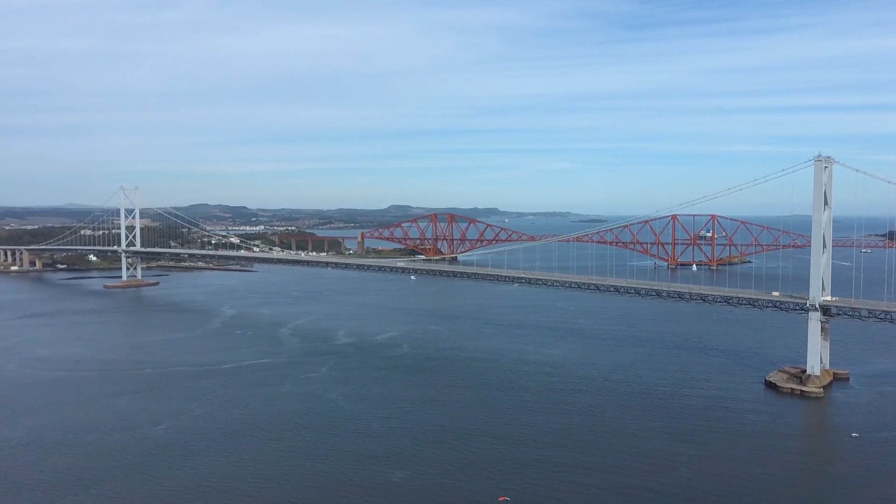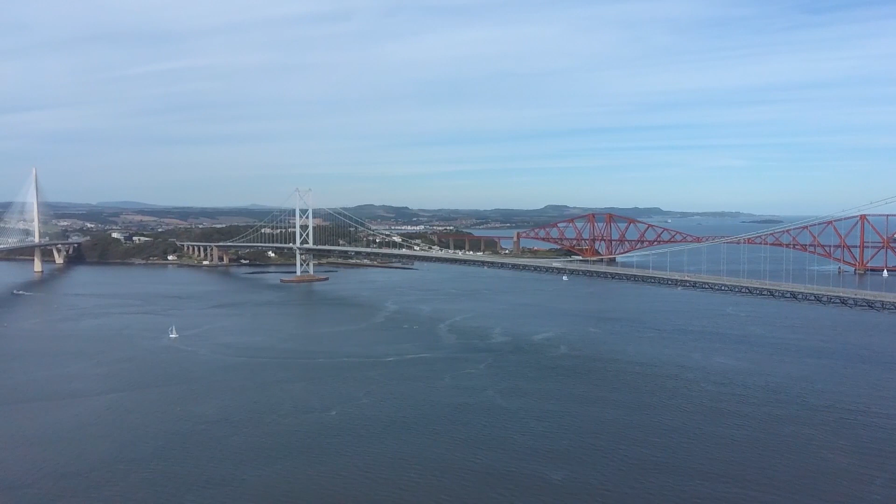Hello and welcome. My name is Gabriel Neves. When I moved to Scotland 14 years ago to work for Grontmij, now SWECO, I had the chance to deep learn reinforcement for British standards. That experience was crucial to adapt to a new way of work that was about to come. When I moved to WSP, my world turned upside down: BIM, Revit, Bentley OpenRoads, Tekla Structures. Before I started my dream job at Trimble, I worked at AECOM. Once more, I had the opportunity to be part of teams that were delivering great projects.

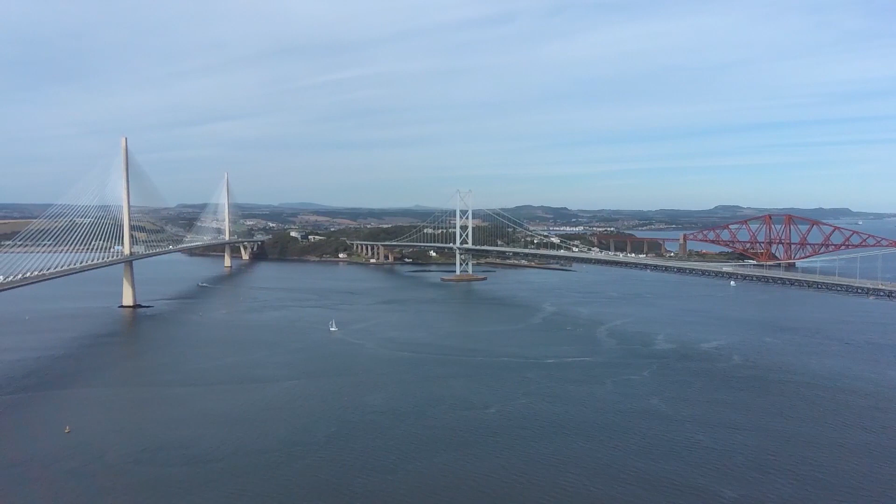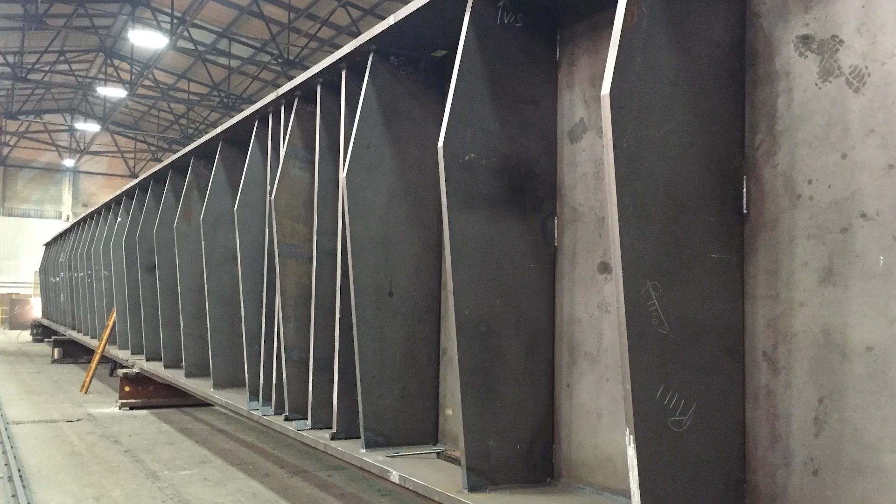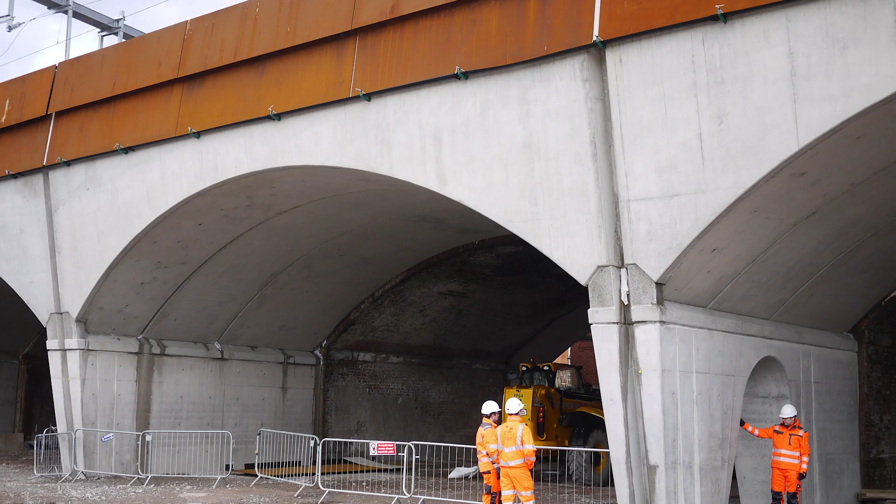One of the experiences that influenced me most was being in contact with construction sites. I realized how things worked on site and understood the contractor's needs, and the way BIM models needed to be to help construction and fabrication. One of my best memories regarding value engineering was when I sat with the BAM Nuttall Skanska Alliance to revise the reinforcement solution for Manchester Northern Hub. Due to the complexity of the geometry, the models had so many rebar shapes that the cost of rebar more than doubled. It was great to work with those that have site experience and realize that without collaboration we cannot deliver efficiently. We put all those models back on track and the cost back to its normal values.

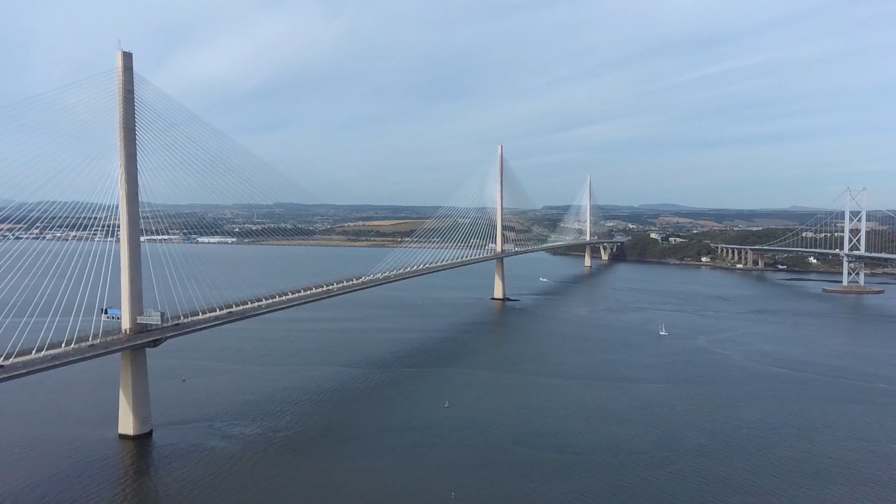Today, I'm going to cover many subjects. If you are just starting, don't be scared or overwhelmed - be inspired. If you are already doing it, don't be steady - be inquisitive and passionate. Here is the structure for today's presentation.

Part 1: What is BRIM? Bridges Information Modeling, BIM for bridges. Part 2: Why are others adopting BRIM? Part 3: How are they getting there? Part 4: Just one advantage among many. Part 5: Can we progress even more? Part 6: The takeaway and conclusion.

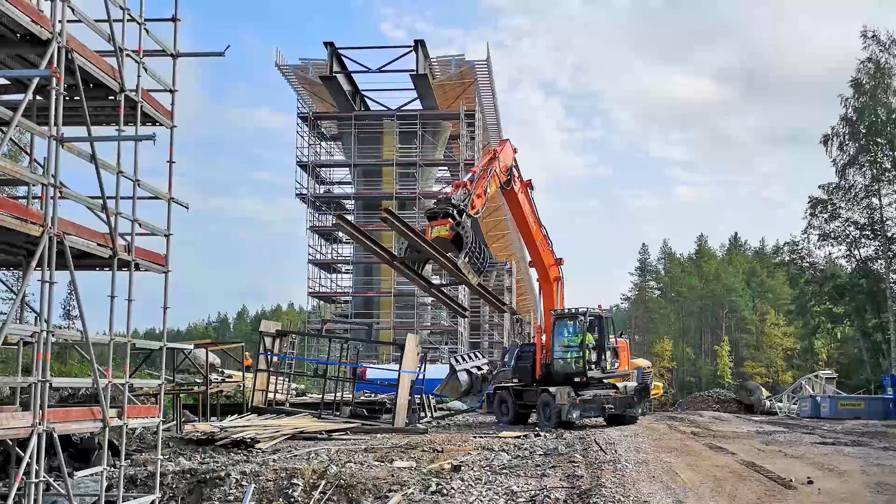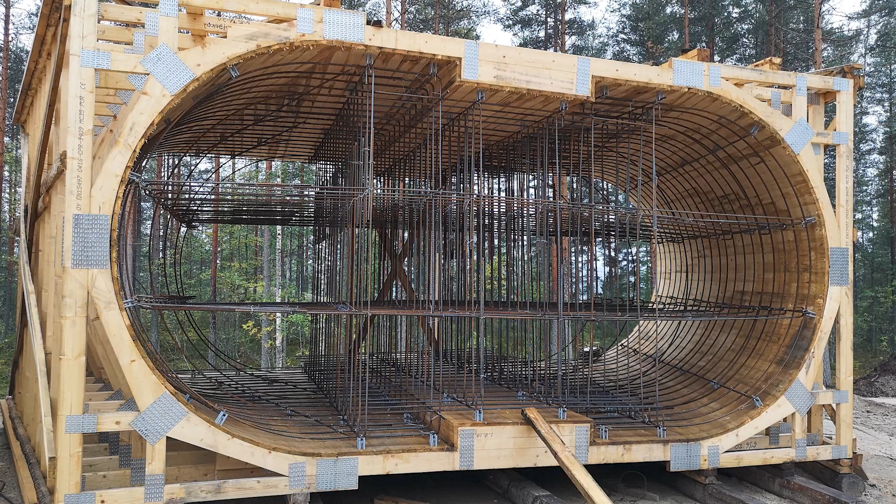A couple of years ago, Professor Ioannis Brilakis of Cambridge University visited the Trimble office in Helsinki, Finland, and shared that the only industry that was behind construction industry in adoption of new technologies was agriculture. And while every other business was moving towards increased productivity and use of new technologies, the construction industry was staying behind despite the proven advantages. I would risk saying that the bridge sector was probably one of the last to embrace BIM.

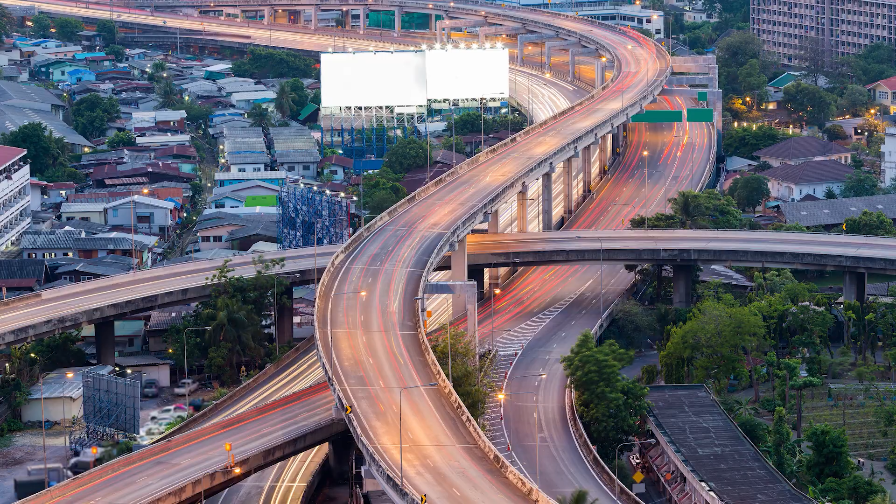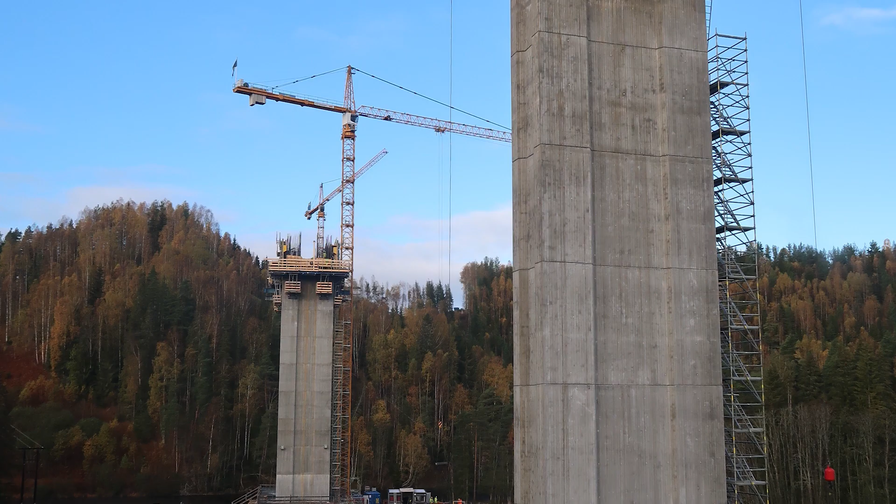This leads us to the fundamental question: what is BRIM? Before we start analyzing the name itself, BRIM, Bridges Information Modeling, let me introduce the Randselva Bridge, a drawing-less project from design, approval, detailing, and now construction. I have interviewed the designer, the detailers, and the approver. For me, this was truly inspiring. I'm going to use small parts of that interview throughout this presentation.

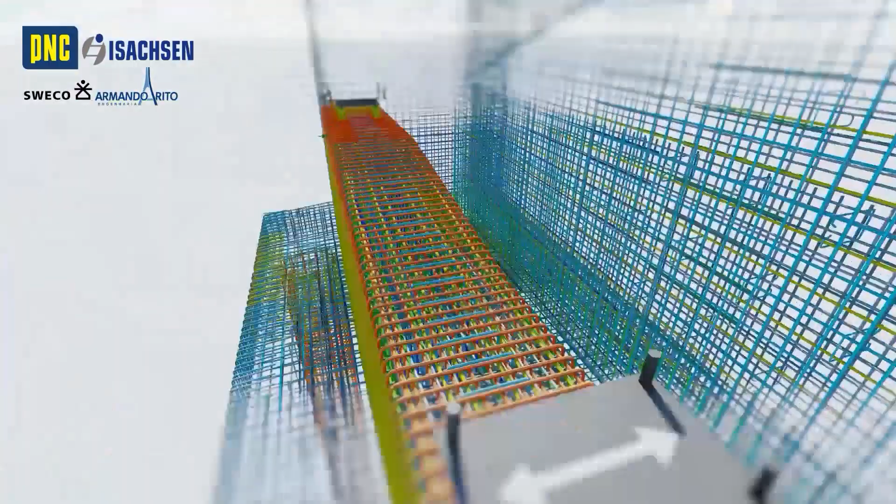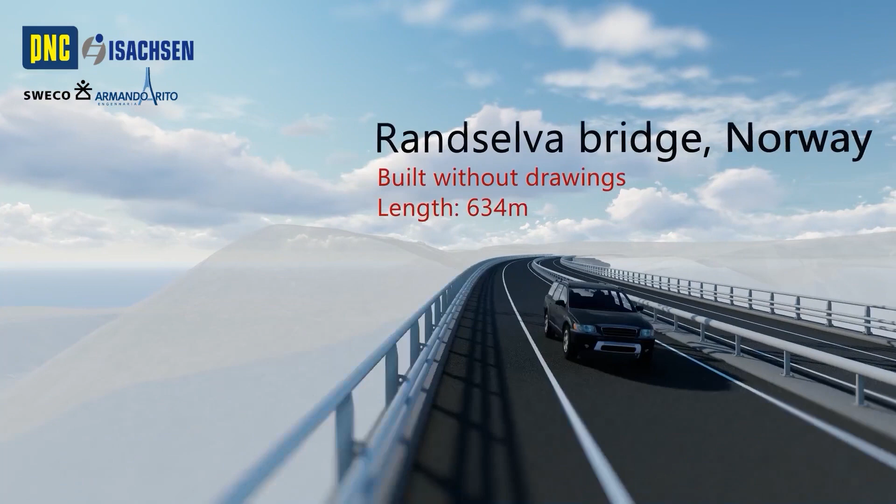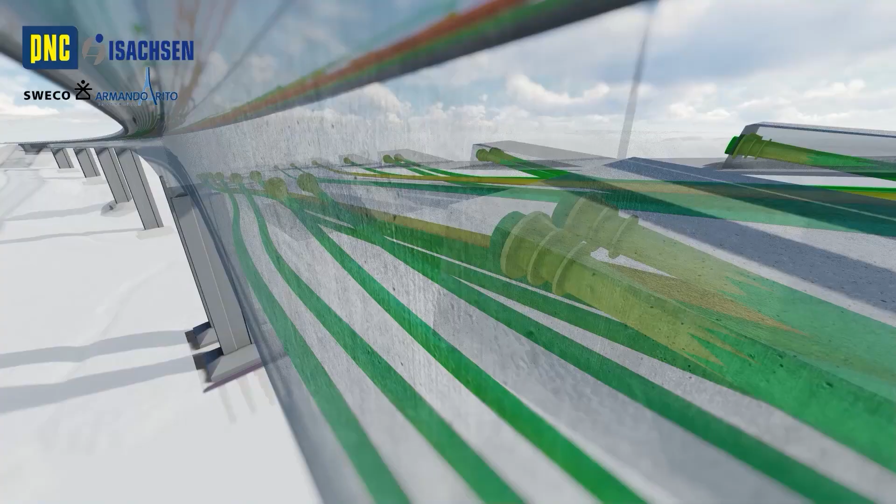Let's break down the word BRIM. Bridges - our specific industry object, our design, construction, or asset. Information - this is the most important point of this way of work. You can have procedures, standards, or even 3D models, but with no information, there is no BRIM. Modeling - model everything. These enriched data models are truly constructible. I know I upset some of you by using BrIM and not BIM, but I'm doing it for a couple of reasons. Bridges are different from buildings. It is more empowering having an exclusive name for us, bridges people. The word building is not a verb, but it should be - building a bridge. Anyway, don't get confused, it is pretty much the same thing.

And now my own definition of BrIM. BrIM is a technological breakthrough, a way of work that focuses on collaboration and automation of the use of the information that generates connected and updated digital data-enriched 3D models by providing a true representation of the physical and functional characteristics of the asset, from its design throughout its entire life cycle.

The BrIM cycle becomes complete when specific norms, standards, adoption of non-proprietary file formats such as IFC, and implementation of common data environment platforms where the information can run smoothly are implemented.

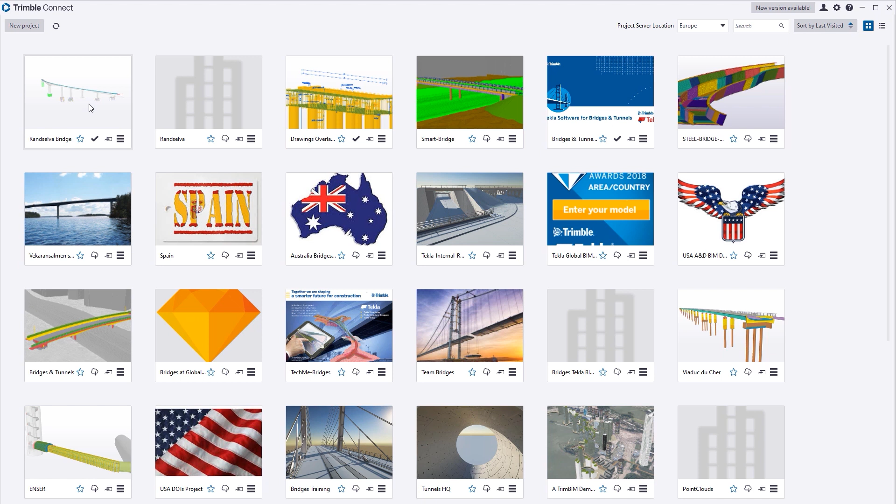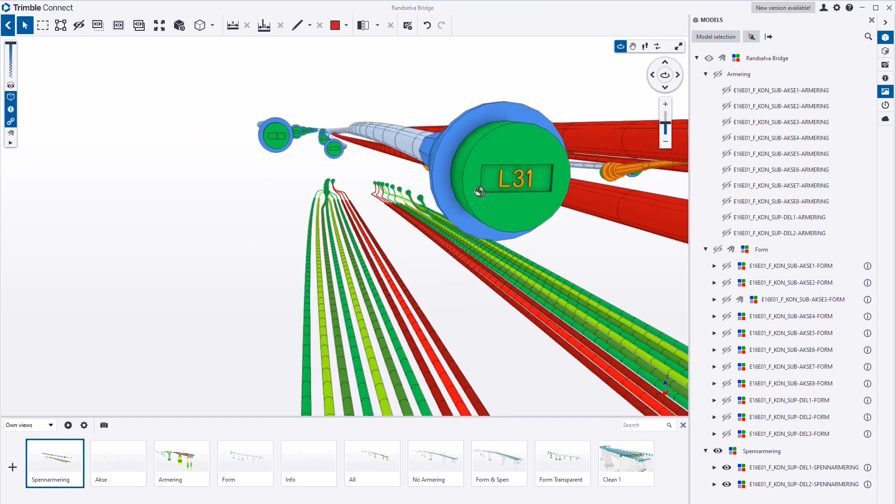Let's break this down and try to apply this definition to the Randselva Bridge project. They are using all kinds of advanced technology, from software to hardware. They are creating 3D models seamlessly shared with approvers, designers, detailers, contractors, and clients. The model is enriched with all the data, aka attributes, that are needed during the entire workflow.

Later, more attributes will be added to the model to make it ready for operations and maintenance. It is following Norwegian standards and some more based on lessons learned from SWECO's experience and this kind of way of work. As well, the approver's experience were added.

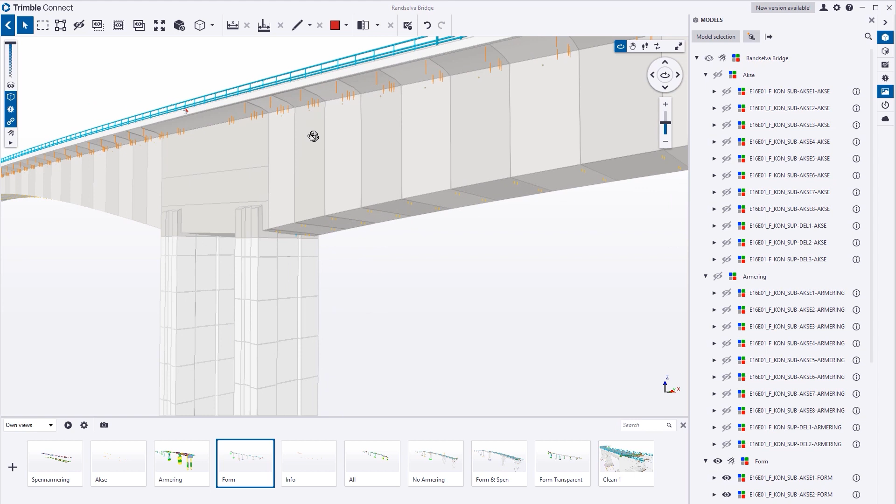IFC is the word, a software vendor-neutral solution to share the models. Different common data environment systems were used during the project. There is one that the road authorities are using to collaborate with designers during the approval process, and a couple of others for designers and contractors. The smart thing here is that the information is absolutely the same everywhere.

The goal is to model everything. The safeguard is, if it is not working in the model, then it will not work on site.

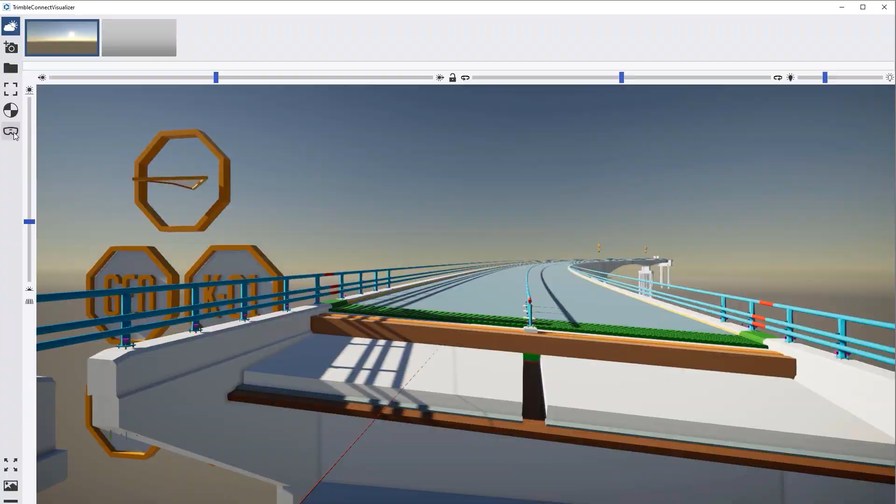The short answer is, why are you doing this? Sigmund, take it away. Yeah, it's already been answered, isn't it? Why not? That's fairly easy.

This is what engineers, or whoever in the industry, live for this challenge, you know. And why don't they grasp it with both hands and run with it? And that's the question. The answer is why not?

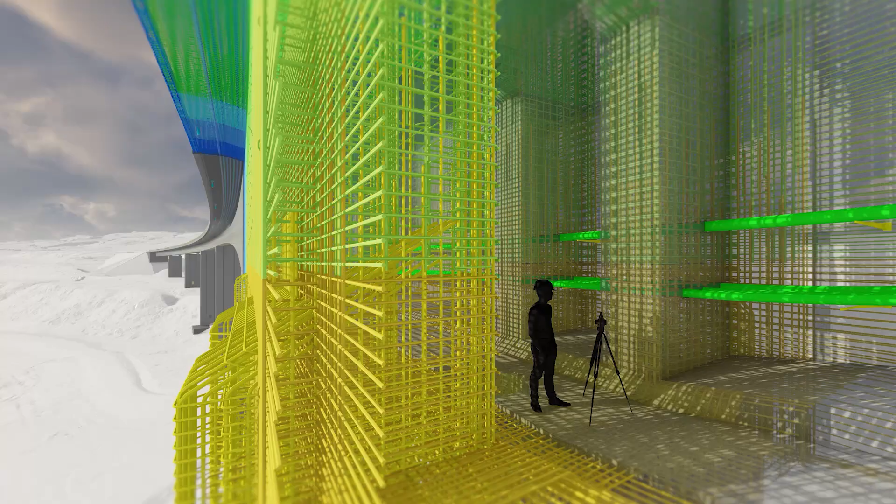Now the serious one is, I think there's also for all of us a need to improve all the time. So you don't want to be stuck repeating the same things. But if you see something that you can advance, you're gonna do it.

Just not having to do extremely boring 2D reinforcement drawings, that's motivation in itself. But I think my main point is, if we're gonna make robots do more of the work that we do in the future, there's really no other way of doing it.

For me personally, it's because it's fun, and it's fantastic to know that we can make a difference. Each of us can make a difference. Also, that we will always have the chance to improve, if we work hard, and we believe we can do it.

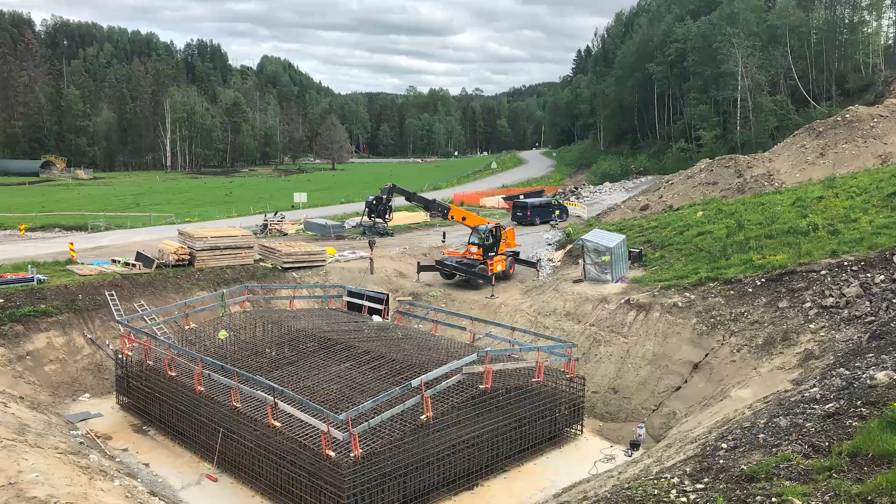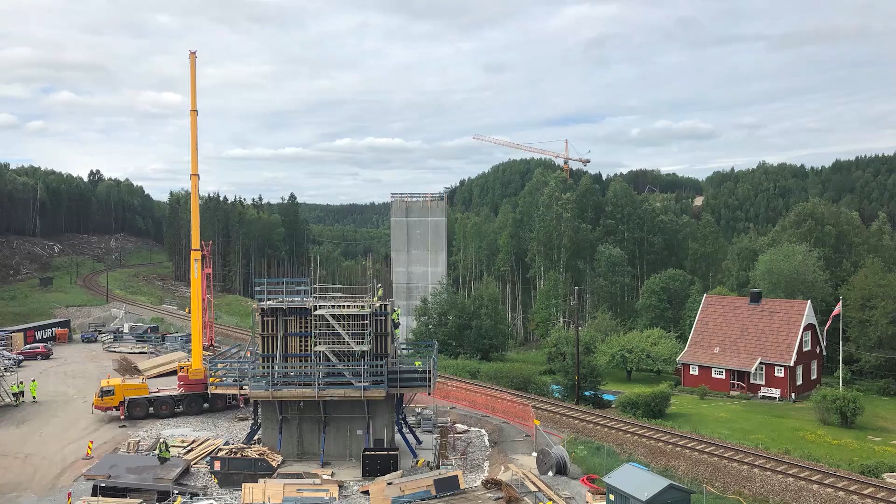During the long interview with the Randselva Bridge team, I learned a great deal about how BrIM is applied into a real job for drawing-free bridge projects. The first point was maybe the most important one: the idea for the drawing-less project came from the client.

The owner of the project is Statens Vegvesen, the Norwegian road authorities. Does that mean the owner wanted to do this project this way? Well, obviously the owner is instrumental in deciding whether to use BIM or not. So sure, the project owner is the one that wanted it.

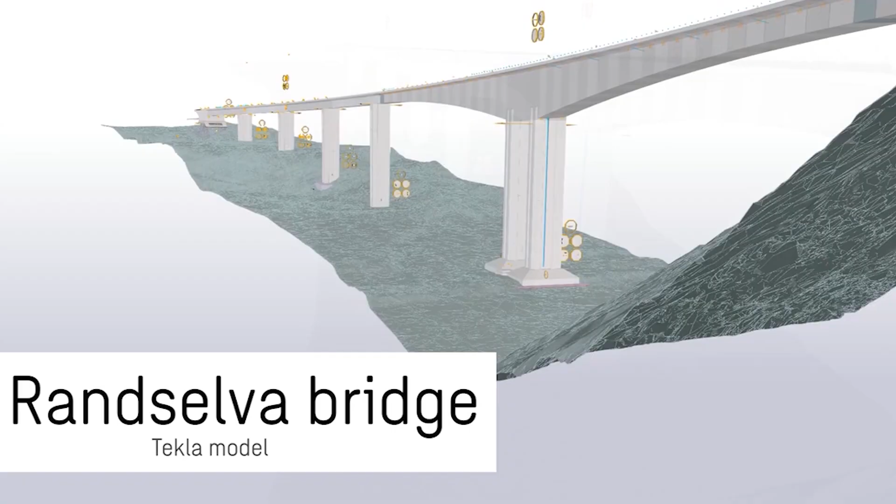During the Ministry of Bridges episode about BrIM, I highlighted a couple of points for how to get there. Let's play those against the Randselva Bridge and check if they are valid points or not. Define your strategy? Yes, they all sat together and defined the strategy. Efficient system of communication? Yes.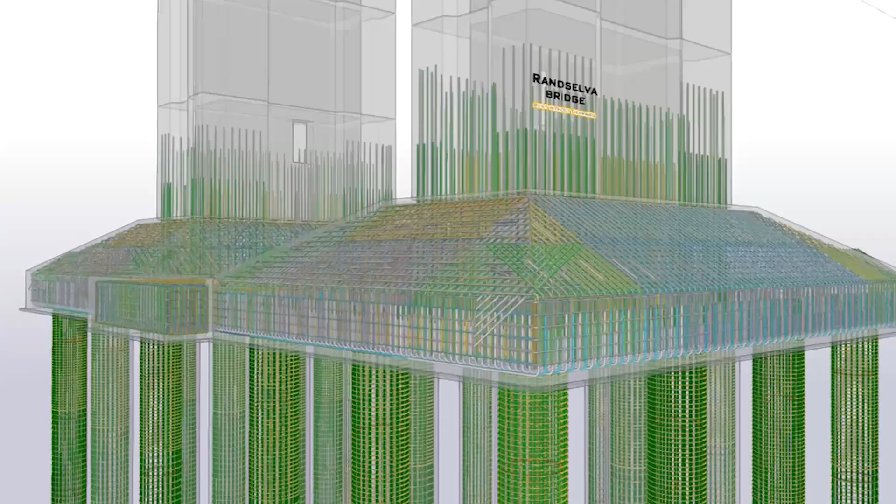Choose the right people for the job? Doesn't know it as well, but we had some hackathons at SWECO. And the hackathons are a big room full of amazing experts in BIM, just shooting at me questions, technical questions, like how can I do this, how can I do that, and just please answer me in 5 seconds. So yeah, I think I mostly interviewed Tiago there.

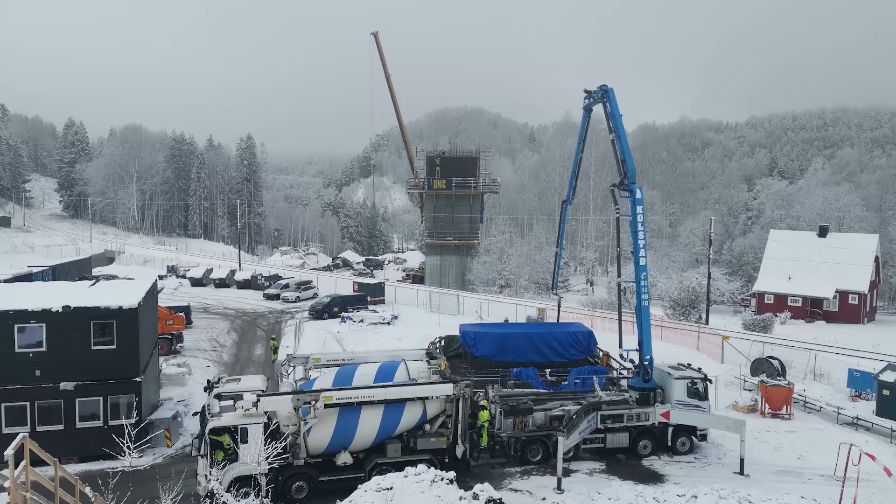So after 8 hours of questions like that, you can imagine my end of the day. Armando and Rito had no BIM experience. They are now ready for more.

Is this influencing the company attitude towards BIM? For sure, it's influencing 100%, because we understood that even though we were already investing some time searching for this way of work, unfortunately we don't have owners and industry like there is in Norway.

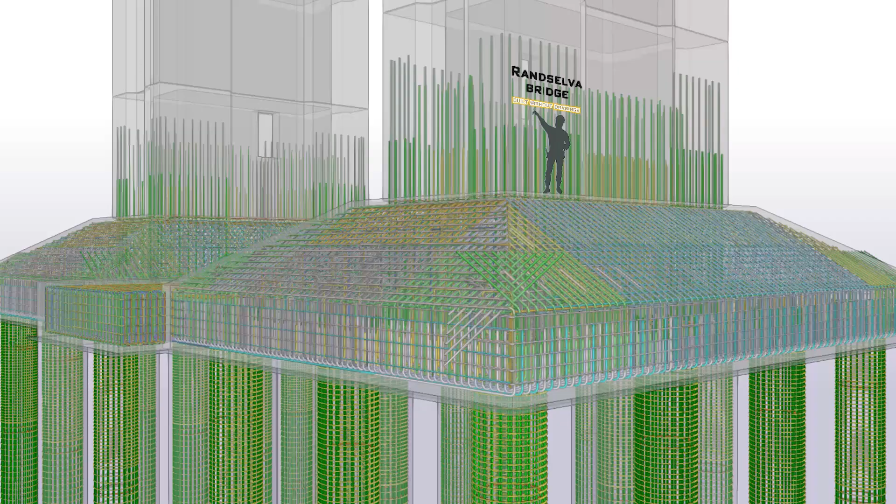So we will have to lead this in Portugal. Use the available information about BIM. They used former experience from a large project with dozens of structures built this way. They have applied the lessons learned here, taking advantage of the other colleagues' work. Absolutely, this is full BIM. No one is redoing anything.

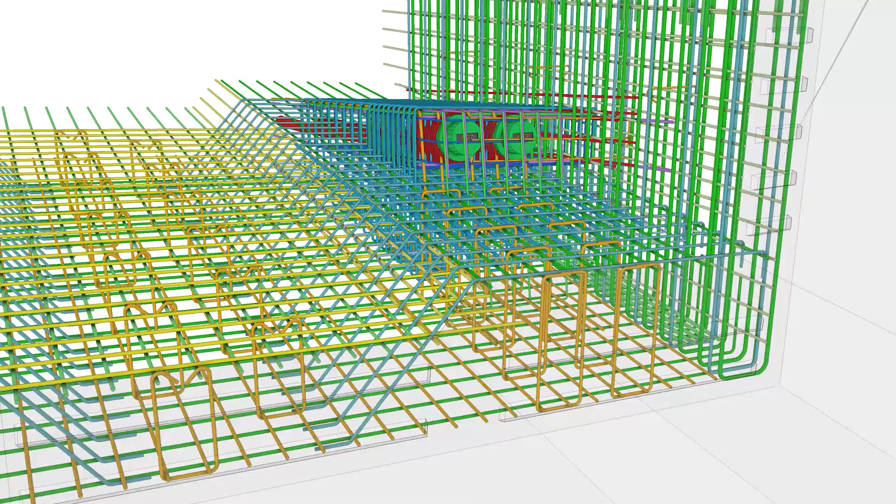Some interesting stuff taken from the Randselva Bridge project. I think, again, design and build are good projects to start with. I think technology is there wherever, as long as you have a computer and something to model with, you have the equipment. So I guess you need an approving government that allows you to do it, and you also need a contractor to work with, and understanding their problems is essential, and gaining their trust is essential.

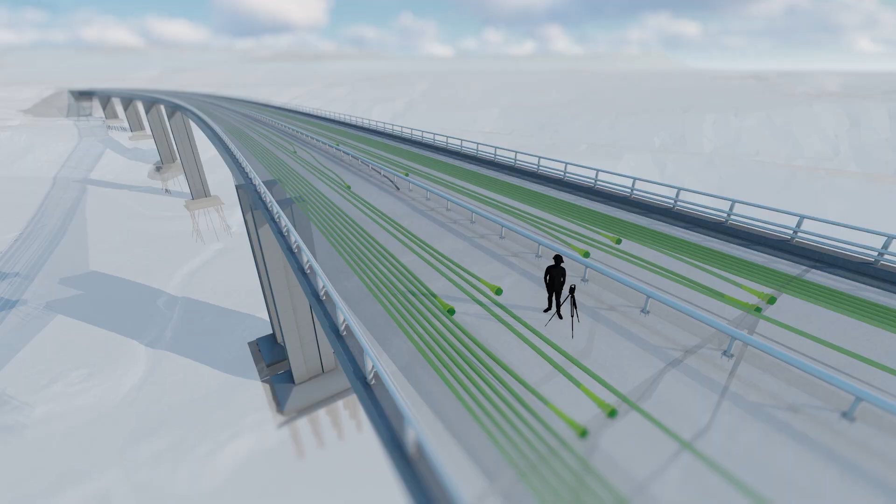The 3D model-based approval exists already for some time in Norway. We allow for BIM to happen in design, thereby we need to allow it for approval. And from that point on, we have now about 150 structures modeled and approved for erection.

That's cool. Maybe the law needs to be changed to accommodate this workflow. We didn't actually change the law because it was already in there, but we needed to adapt it and develop it. So this is where the principles came in, where we saw a basic and major principle was that the detailing of a model needs to be the same detailing level as demanded for drawings.

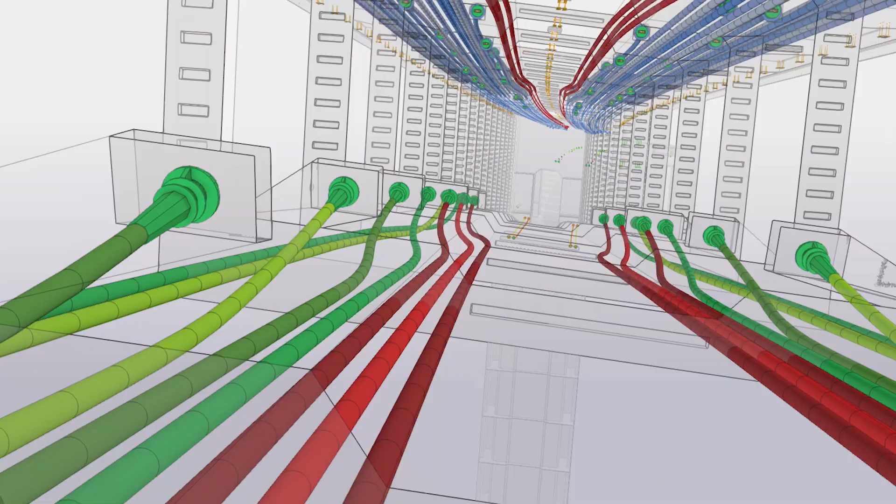That was one big principle. Another principle was that all the information that was developed needed to be incorporated into the model, or you should strive to incorporate all the information that you develop during a design phase into the model. Sigmund is open to share experiences. Hopefully some decision makers in the room will pursue this lead.

We have spent a great deal of time with the how. I think it is more important than the advantages, just because the advantages are well known by all of you. That is why I just bring one advantage, one among many. What I do know is that a previous review that we did was released, showing a comparison with traditional projects and projects using elements of BIM.

What it showed was that traditional projects had a cost overrun of about 25%. Using elements of BIM, they reduced that cost overrun by half. So instead of 25%, you had numbers like 12, 13, 8 percent. So it's of course that even there you see sort of the benefit about using BIM. And I'm sure that as it develops, you will see new reviews and new figures.

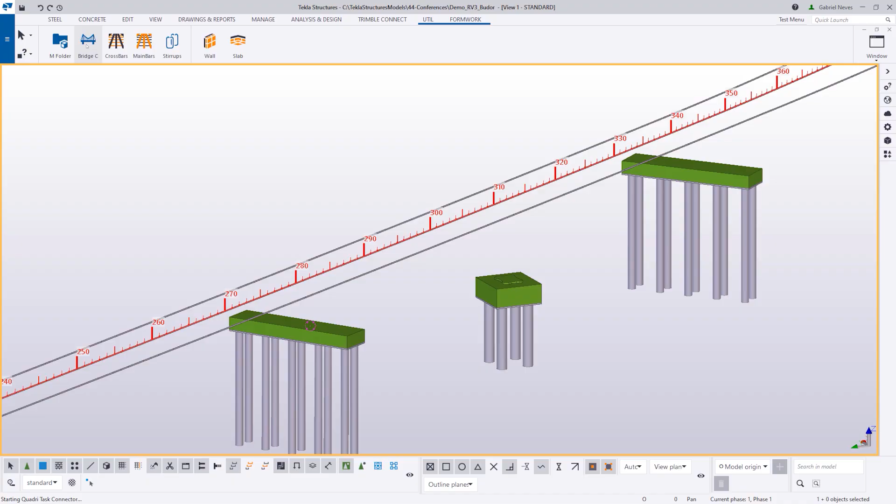Can we progress even more? Yes, we can. Software and hardware are evolving at a fast pace to fulfill your needs. Even if you are not going to use the most advanced workflow, there are always other well-advanced tools that can help you with a specific task.

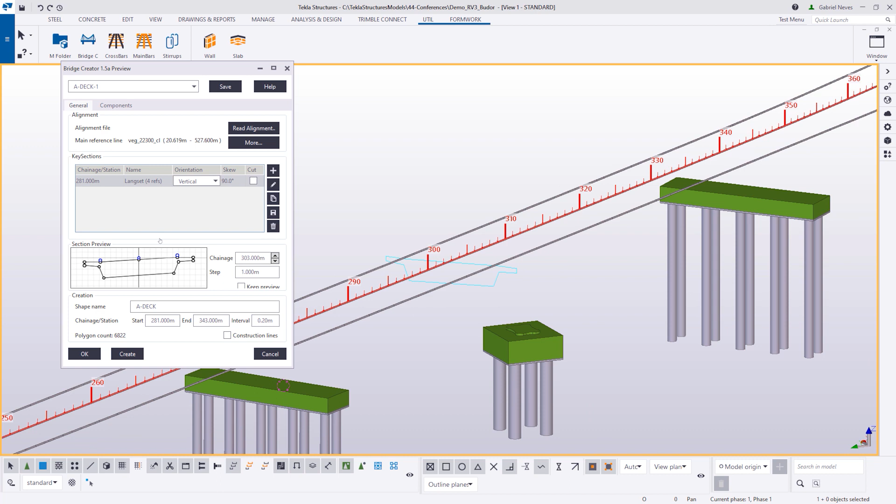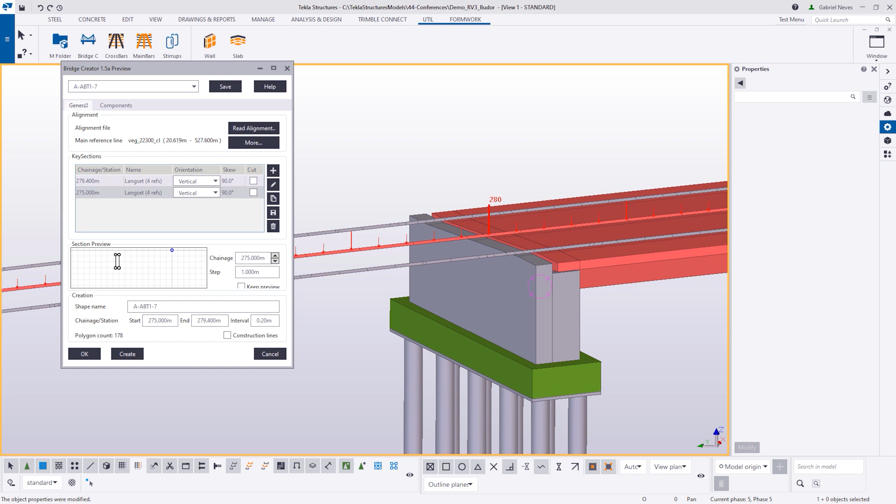To show a little bit of hands-on, let's jump into this example. Here is a tool called Bridge Creator that can read LandXML files, text files, or spreadsheets, or even any 3D line. You define a profile and constrain one or more points to those lines. This allows the creation of any double curved geometry, which for us is one of the most difficult processes in modeling 3D bridges. After that, define the start and end chainage, the skew or super elevations in case you have just one single line to work with.

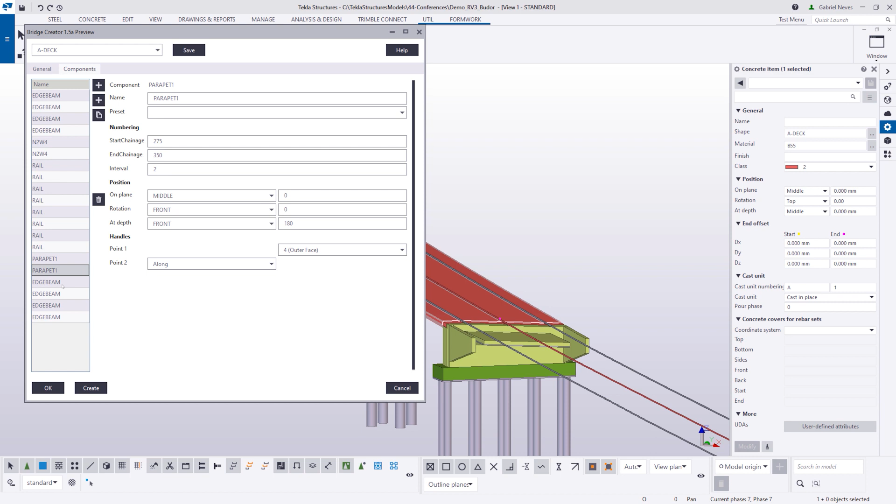With the same simplicity, objects can be placed along any line as beams or polybeams, or even any component or block that you have created previously. There are some similar tools in the market. Unfortunately, I didn't have tools like this one when I was in detailing. Now things are getting easier.

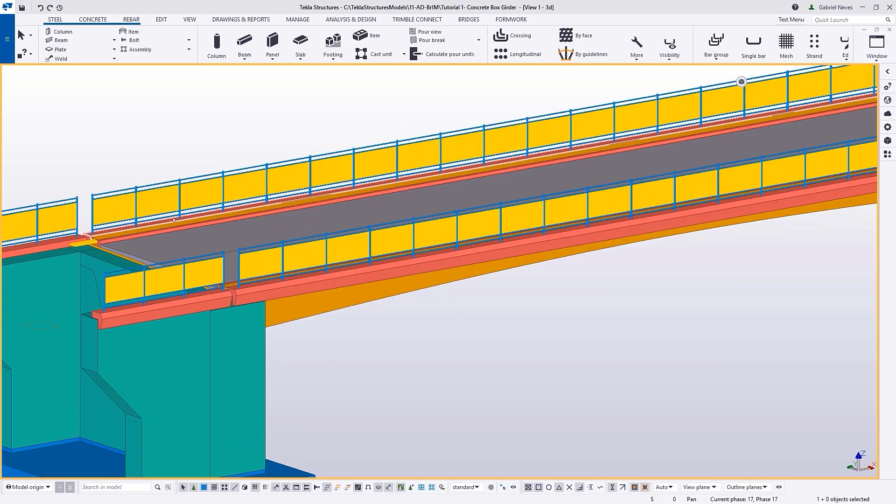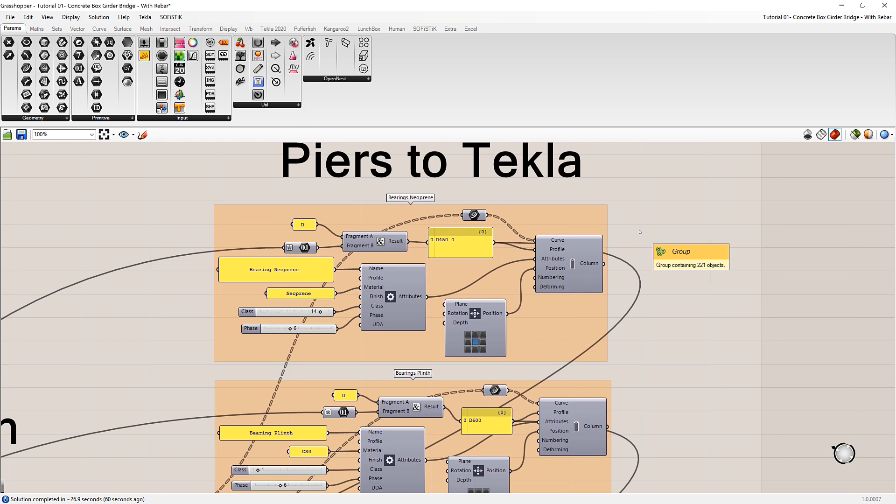I know some of you in the audience, and because I know you are a bit of a bridge nerd, I have brought this next video specially for you. What you are seeing here is without doubt the most advanced workflow for bridges right now. It is not for everybody, but it is not rocket science either. This is a visual parametric programming language, Grasshopper, which is a plugin for Rhino, and it is connected directly with Tekla Structures. The bridges you are seeing here are 100% controlled by Grasshopper script: concrete, rebar, steelwork, steel connections. In this case, I have connected the Grasshopper model with SOFiSTiK.

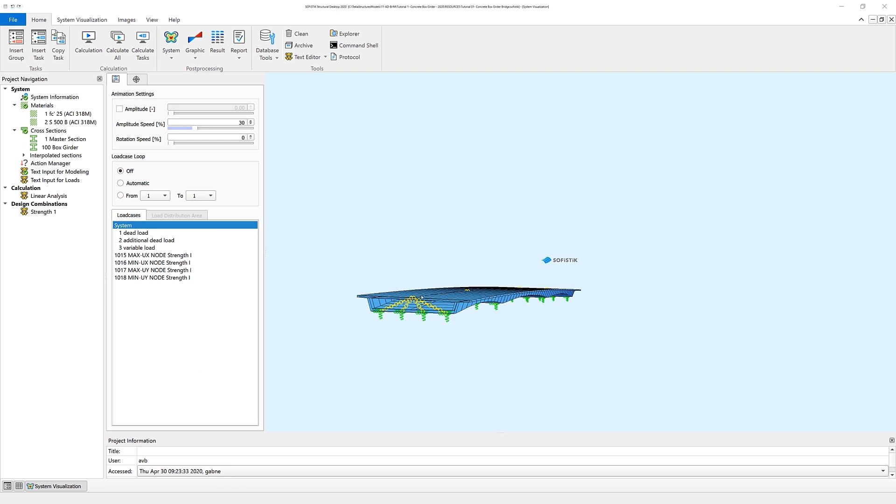This is giving the absolute power to the designer, as it should be. Your design, your decision. Build a script, make amendments, connect it with Analysis and Design and BIM models. From this moment, any change will always be updated in both models. In the BIM software, the drawings and bill of quantities will be updated too. Everyone can take advantage of this solution right now.

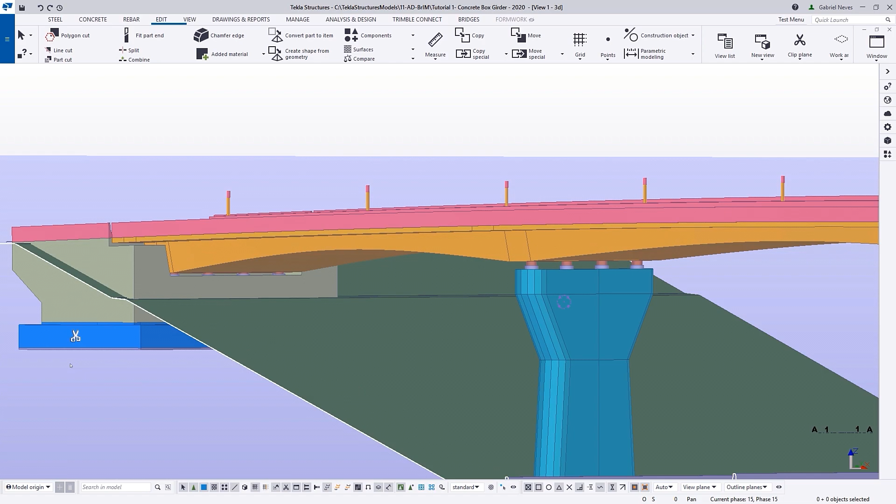I have told you this is not rocket science. The best proof is that I did this myself. The first script took me 3 weeks to complete, while the second took 1 week, and the latest a couple of days. And I'm not the smartest person in the room.

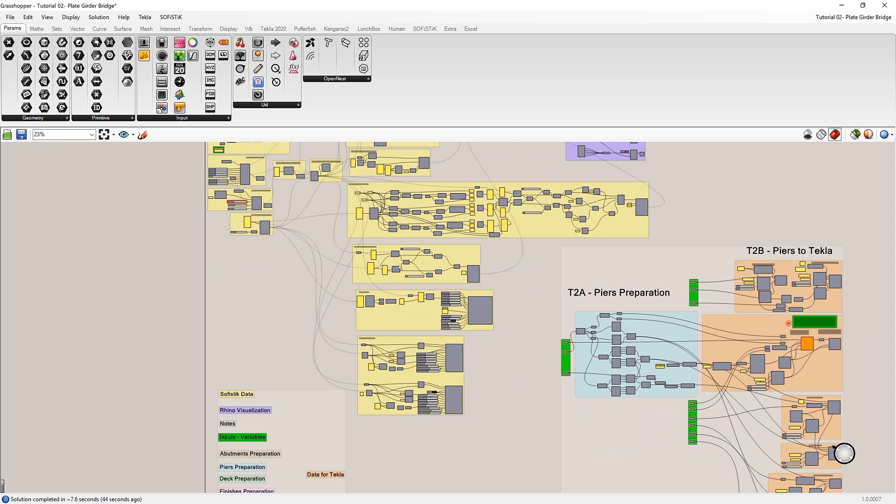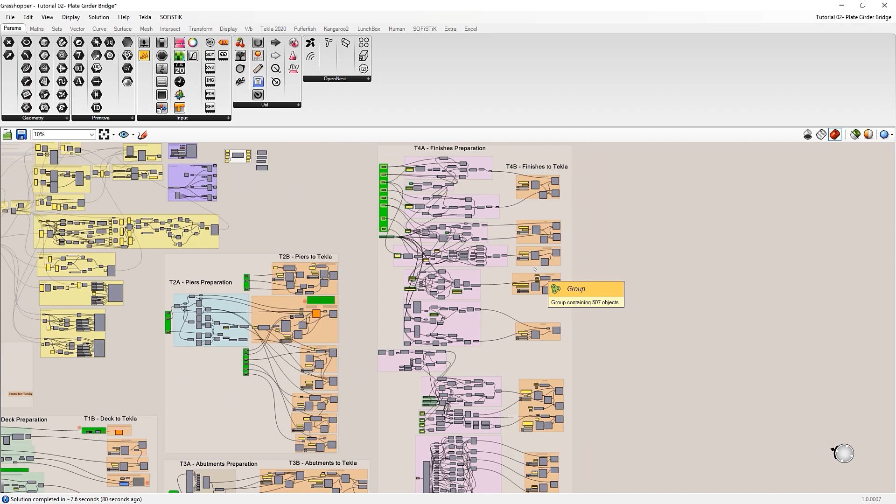The way I see things is that more software vendors will develop their APIs to visual scripting, and you are the winner. I would love to see LUSAS, Midas, CSI Bridge, and all the others doing something similar. Allowing the software to openly communicate with each other is the way forward. I don't believe that one single software vendor is able to deliver every single project at present or even in the future. Having solutions like this can help you immensely.

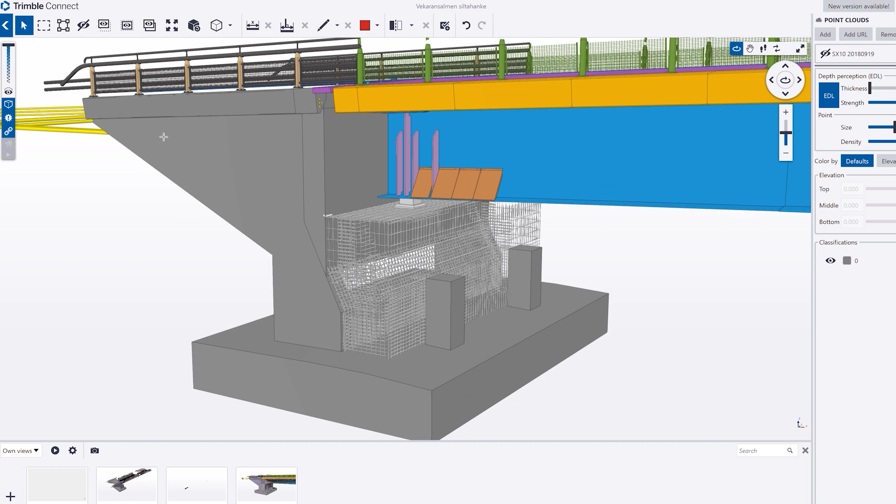Why not have a go and compare the design with what has been built? In this example, the construction matched very nicely with the design.

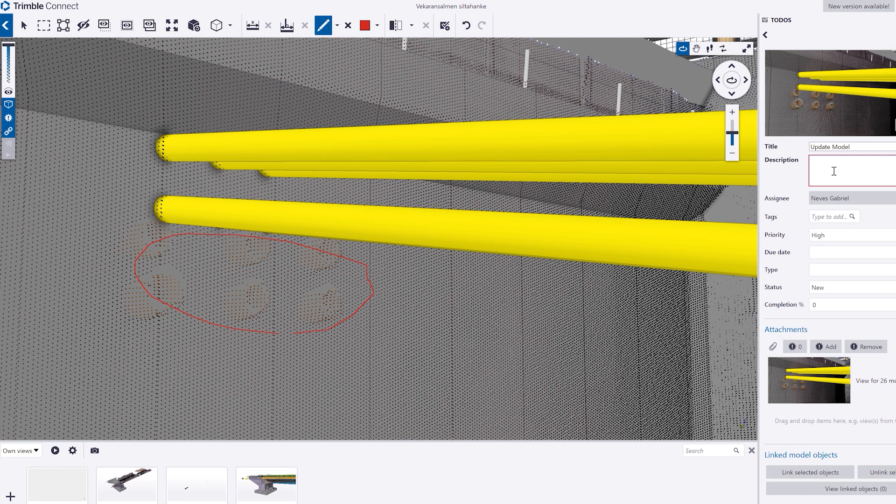Looks like they have changed the location of the pipes during construction. You can create a to-do: the model needs to be updated before the as-built is sent to the client. If you want, you can use BCF comments too.

If you think it is risky building without drawings, here's a hybrid way. I think it can help construction or fabrication sites.

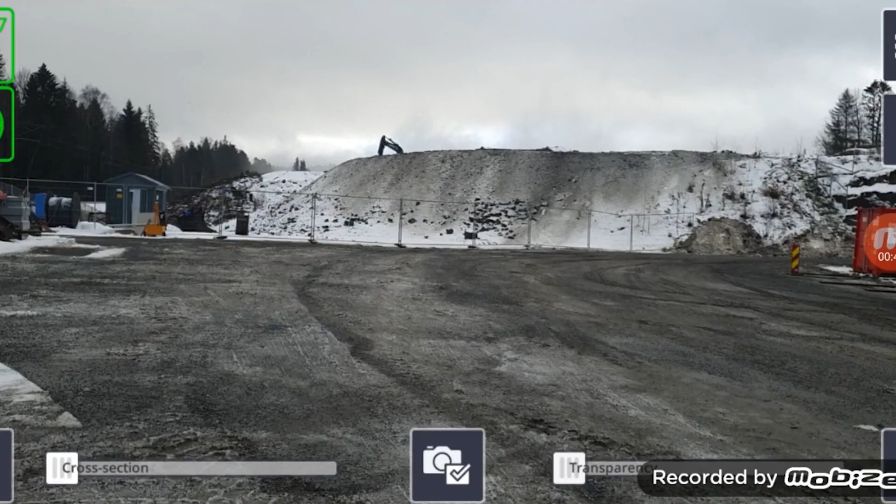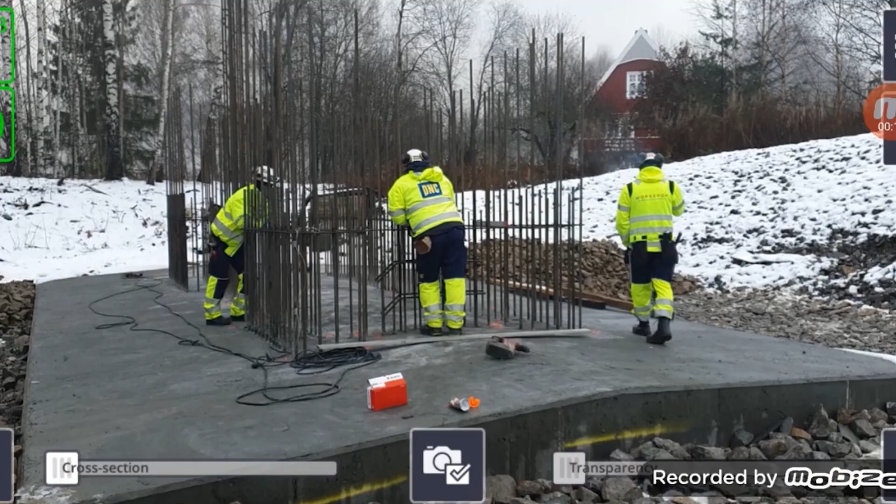The Vekaransalmi Bridge team has been taking their work another step further into the future with the use of the augmented reality system Trimble SiteVision. This tool is a high-accuracy augmented reality system and is being used on site. It is made of a satellite antenna connected to an Android phone. Using a dedicated app, the virtual version is then superimposed with the reality captured by the smartphone camera.

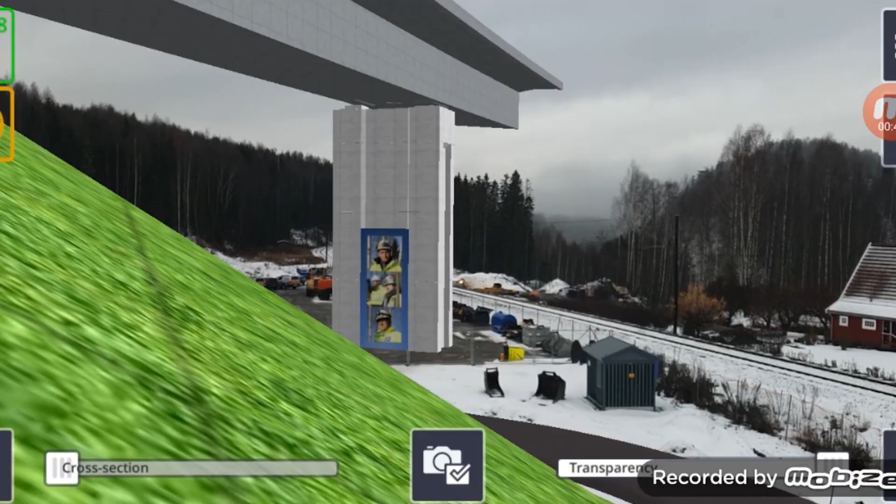It can be of great help when installing pipes, placing scaffolding, or even rebar cages. But this is not the only possible application for this kind of gadget. What about as a support for bridge inspection?

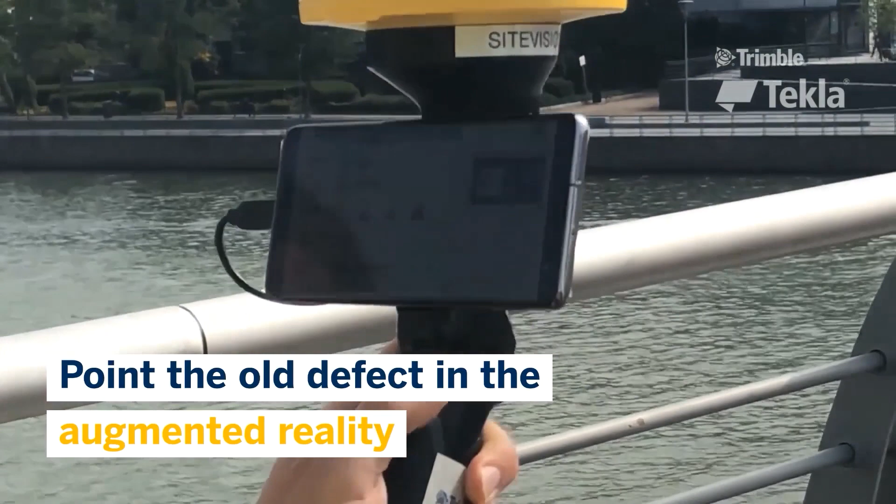If this is for outside use, let's look into something for indoor use: a site hard hat with Microsoft HoloLens. By projecting holograms, the shop worker can take advantage of this augmented reality tool. Clients and designers are using this gadget for indoor visualization of the models.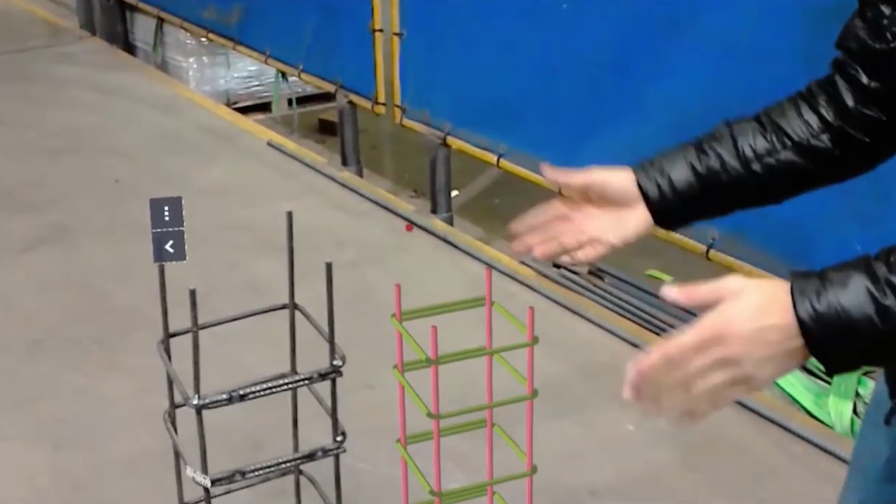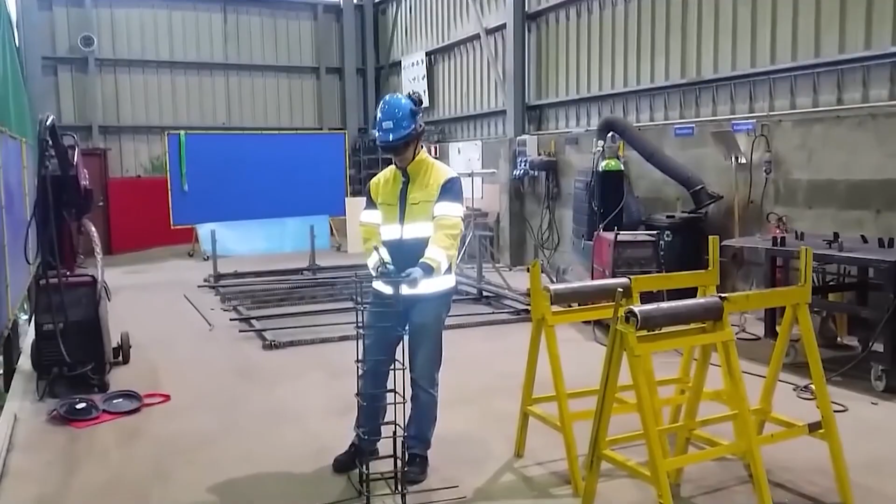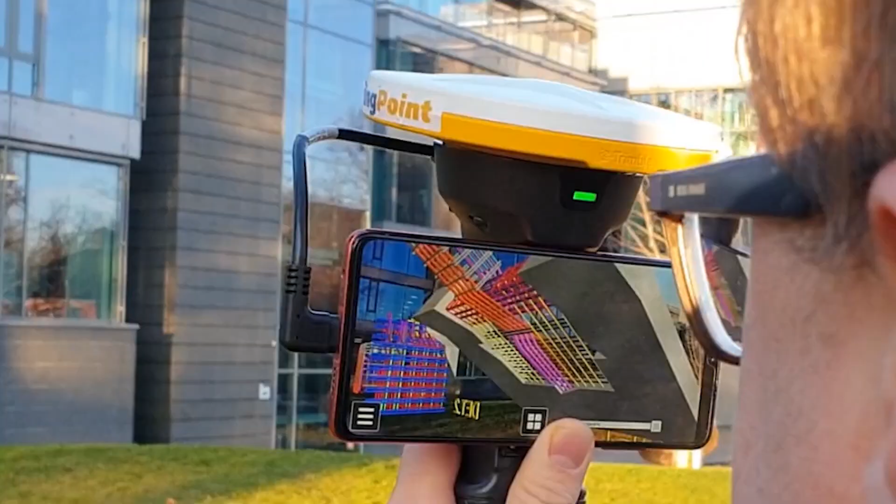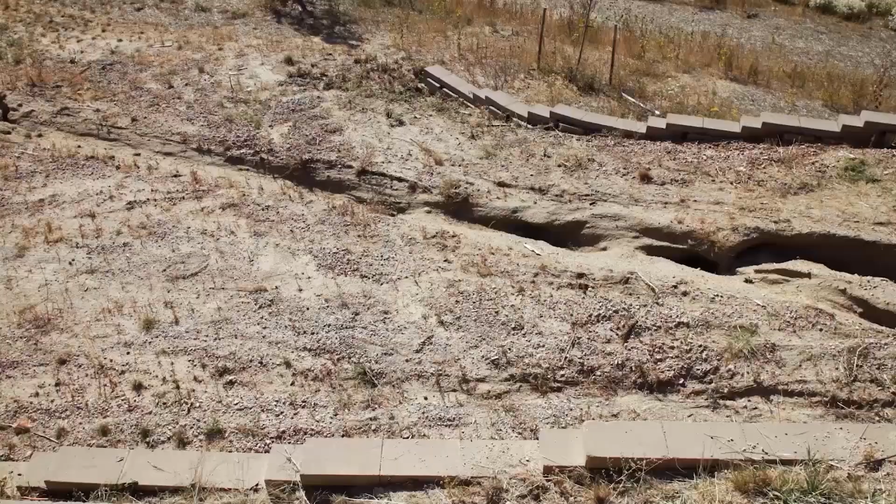Robotics and artificial intelligence are coming? Well, it is already here. Boston Dynamics robot dog carrying total stations, AI applied to automatic creation of drawings and design routines, and much more. Some of the design companies already have AI routines to support design.

Our industry cannot progress into the future of robotics and artificial intelligence on site using 2D drawings, or even 3D models not able to contain constructible data. This is because the machines cannot read 2D drawings.

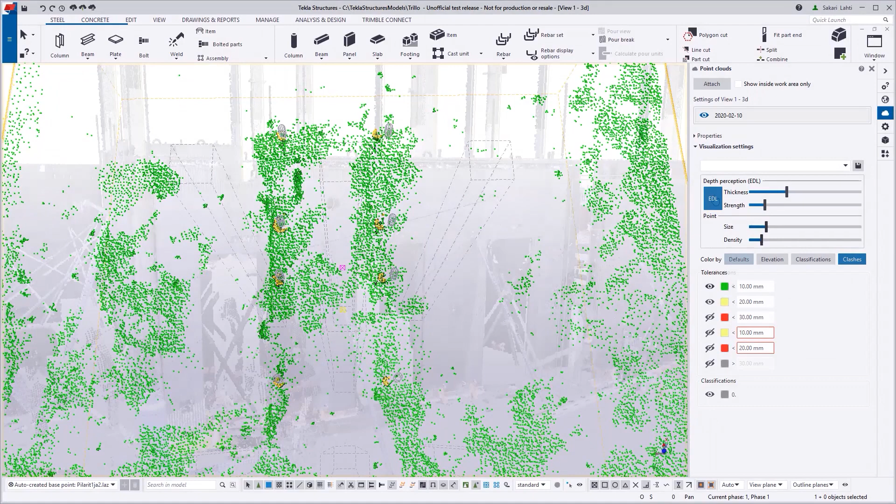Our bridge sector was one of the last ones to wake up for the BIM call. My advice would definitely be for them to see challenges like this as a goal to achieve, and not as a showstopper to stay in comfort zones. I think this is a goal to achieve, and it's possible to do it. It's just, of course, hard work. We all know it, but it's possible to do it. It's just a matter of investing for that.

Things are now developing even further. Are we going to be the last ones again?